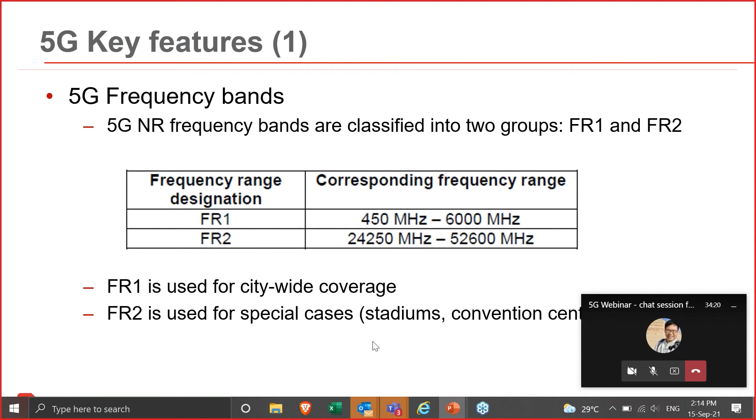Of course, latency is RF plus the wired, the internet side, the core side, but the RF side can be controlled using numerology. So we'll see later how numerology can impact the RF latency of your design. And that depends again on your applications that you want to use on your 5G network. So more flexibility for certain applications.

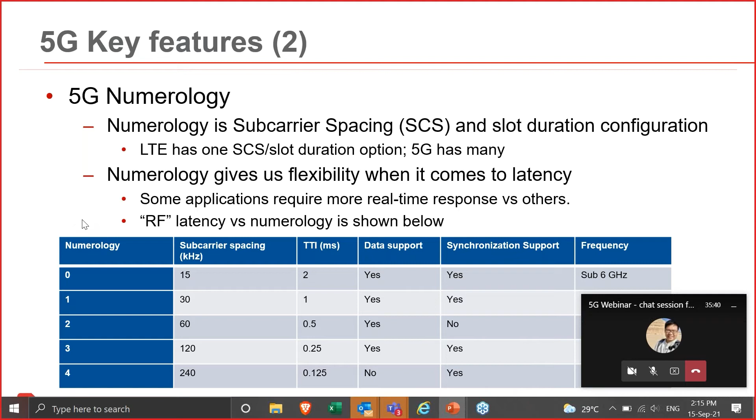The next one is known as network slicing. So again, 5G is being promoted as the ultra flexible technology. It's not purely for high throughput, high capacity. It can be for mobile broadband, which is what 4G is mainly aimed for, but it can also be for things like IoT and real-time, either autonomous driving or remote applications, whatever it can be. The idea is that network slicing allows you to split your network into different slices or segments and then have different parameters on those slices so that they are optimized for the services or the applications that you want to deliver.

So in IBWave, KT will show you how you can define the beamforming based on the antenna manufacturer you select. As a result, you will see an overall better throughput, not only by customer, but by cell. You get the most out of your network by using beamforming antennas and technology.

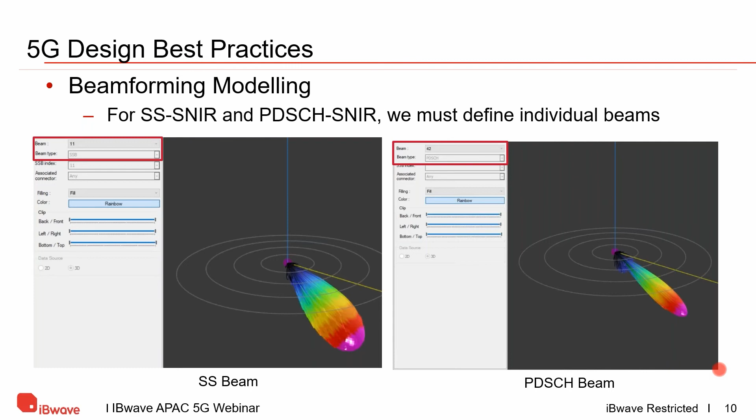So the second best practice is to take a look at what is defined as UE beamforming antenna gain. So far we talked about the beamforming at the base station or the gNodeB. So what about the UE? Does UE have beamforming? The answer is yes, it does at millimeter wave frequency.

For the teardown report on iPhone, and what Samsung has said in some public presentations, they have two RF modules at millimeter wave frequency. Each of these modules is a 4 antenna array. Why do they have two modules? It's because each of those two modules has a different linear polarization - one is plus 45 degree and the other is minus 45 degree, with 6 dB antenna gain.

So our suggestion is to define the 6 dBi antenna gain in our tools.

The next topic is on body loss. Body loss is higher at millimeter wave compared to sub-6 GHz. In IBwave, we measure body loss with 2-person penetration to be in the 20 to 25 dB range. If a stadium antenna is mounted overhead, we think 1-person penetration at 15 dB body loss is going to be more appropriate compared to 20 to 25 dB. This is the body loss suggestion based on the worst case scenario, where the stadium is a full house and everyone is standing up during the game or concert.

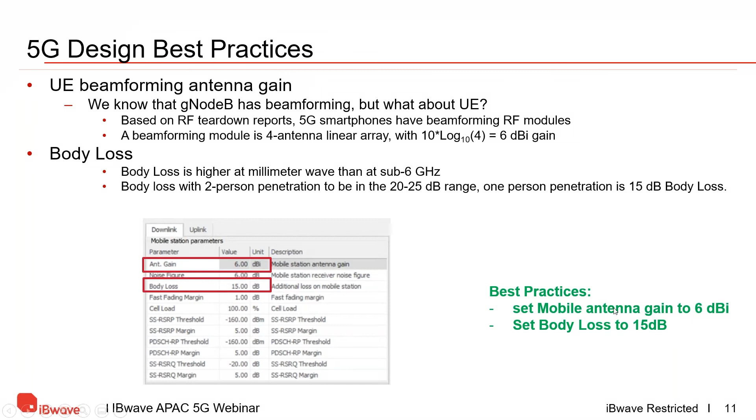Oops. Sorry, the screen's not moving. Come again.

For the compliant distance, we can figure out the location of exclusion zone number 2. Now we know what our exclusion zone number 1 or number 2 is, so we need to figure out which one is larger. Then during the site survey, we try to find the location in the venue where we can have clearance between our antenna and the larger of these 2 exclusion zones.

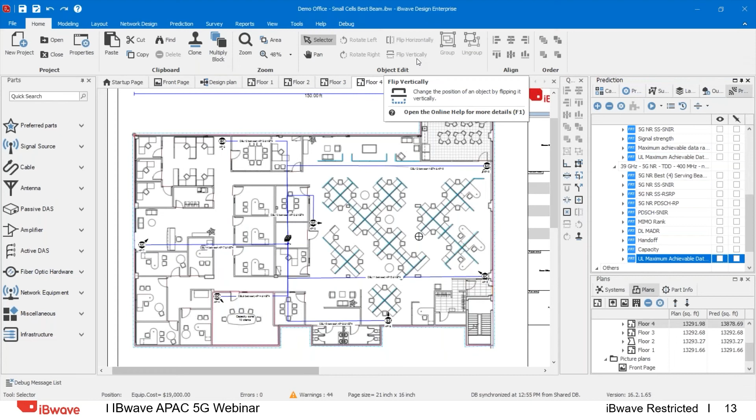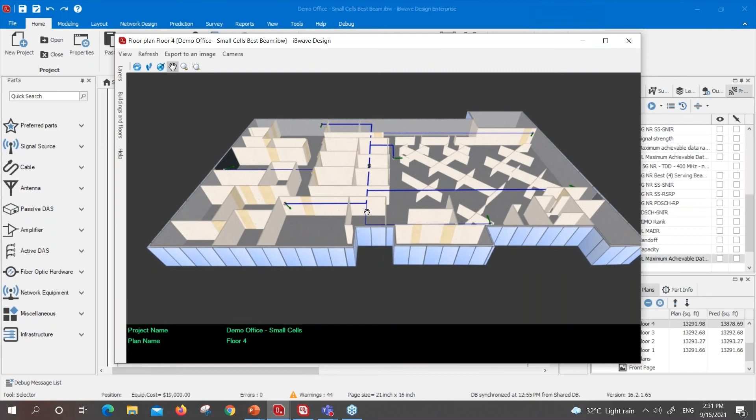So first, what do we have here? We have this floor plan with partitions defined, and a design of small cells with their locations shown. Let me show you how they look in 3D. You can see the partition is defined, and here are our transmit antennas. These are the antennas located at the cubicle area, these cover the meeting room, and these cover the entrance. From the entrance, this is the hallway leading to the meeting rooms.

So where do we want to put our antennas? We can imagine when guests come to the office, they arrive at the entrance and are always invited to the meeting room. So we must make sure we provide a very good connection with high throughput from the entrance to the meeting room. Besides that, we also need to make sure there's continuous connectivity from the entrance to the meeting room, and make sure the hallway is covered as well. So this is how we strategically decide where the small cell locations are.

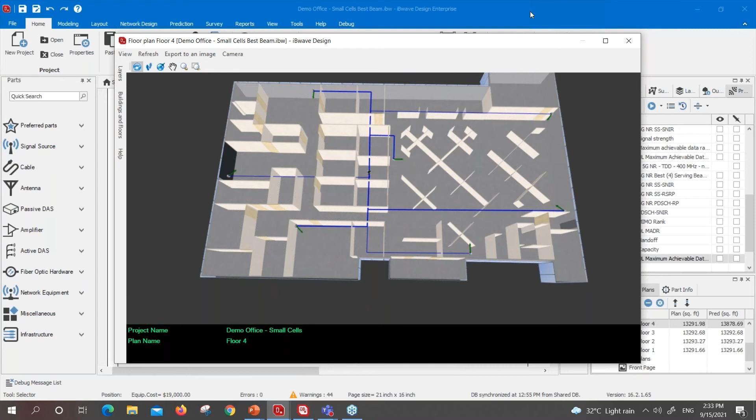So now we need to go to the property to make sure that what we did matches what we decided before. In IBWave design, when we do our sanity check on the parameter configurations, you can go to the property. For 5G, you can go to the 5G NR technology here.

This is what Damien mentioned previously about network slicing. In IBWave, we call this a bandwidth part. Usually nowadays, for example in 3.5 gigahertz, we have 100 megahertz bandwidth. This is the start of the deployment of a 5G project or network, so the 5G user count may not be high. The operator may not want to fully deploy the 100 megahertz bandwidth for 5G, so what they can do is separate it — 80 megahertz bandwidth for 5G, and the other 20 megahertz they can define as, for example, IoT. So in our tools, we need to define this IoT as a bandwidth part, and later we can use this profile in our system configurations.

Coming below, we have this EMF setting — these are the safety distance settings that customers can set based on their country's regulations. After setting this, our tools will calculate the safety distance between the human body and the antennas, so we can identify where our exclusion zone is.

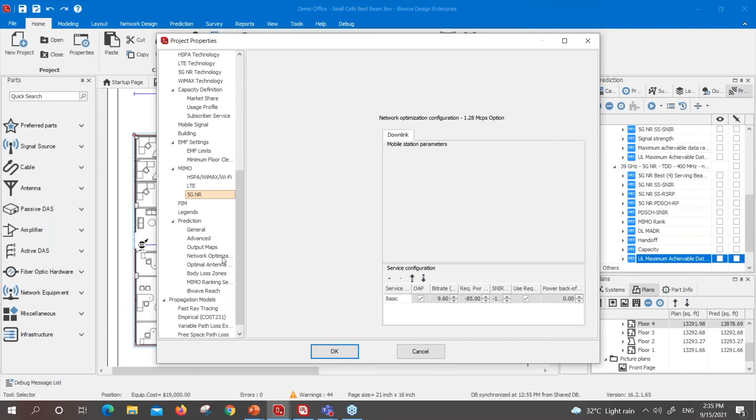Next we'll go to network optimizations. Here you can see the various types of technology IBWave covers. For 5G NR, you can see here there's an antenna gain. During the previous recommendation, we recommended defining the antenna gain as 6 dBi and the body loss as 15 dB. So this is a sanity check that we need to do.

Let me enlarge this screen. At the bottom you can also see that in our tool, we support 5G NR up to 256 QAM. All these parameters are set based on the 3GPP standards.

So after we do this sanity check, we go back to our floor plan. Now we need to check our signal source — we double click on this small cell.

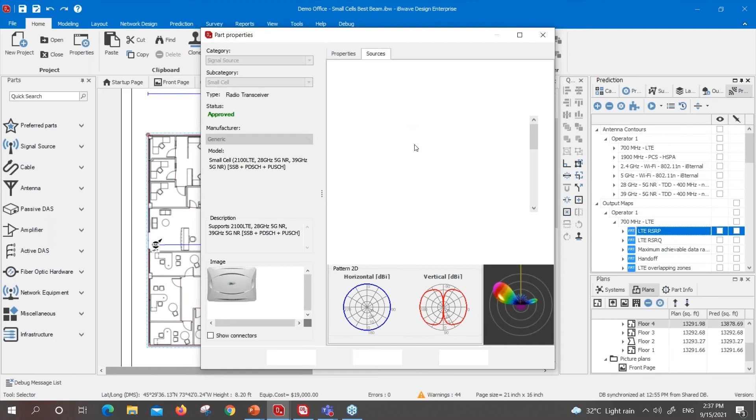So in this small cell, you will see the manufacturer name and the models. This is the small cell which covers 2.1 gigahertz LTE, 28 gigahertz millimeter wave, and 39 gigahertz millimeter wave. It has the SSB beam defined, PDSCH beam defined, and also the PUSCH beam defined. The transmit power will be 20 dBm. This value is based on the manufacturer's technical spec.

At the bottom, you also can see the antenna patterns in 2D and 3D. This small cell is defined as a 2x2 MIMO. So we can click inside there. In here, we need to make sure that we define the band properly. You can see we support up to 60 gigahertz millimeter wave and 3.5 gigahertz for 5G NR, and LTE for 700 megahertz.

So let's see for the 5G. We go to the millimeter wave. The millimeter wave for the 5G network is actually a little bit different from the LTE. In 5G, you'll see that slightly different additional configurations are required. At the bottom, you can see the sub-carrier spacing, a terminology that was mentioned previously by Damien. These are the 5G features and the resource block along with the sub-carrier spacing configurations.

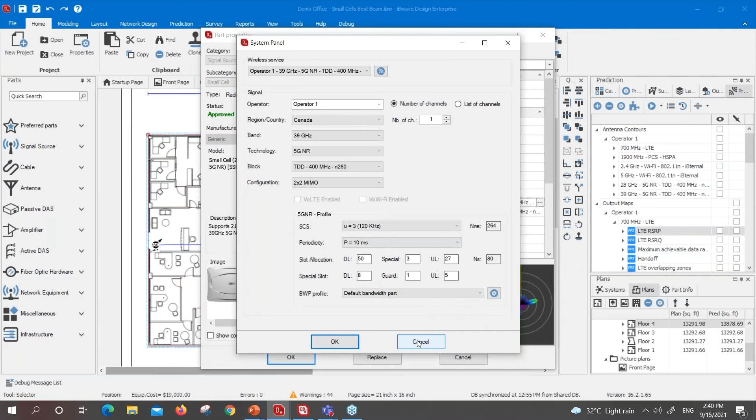Okay. So the final one will be the bandwidth part profile. These are the ones that we mentioned. Once we define another slice or segment, for example IoT, then we can select it here and allocate 20 megahertz for this IoT. Okay, so now we have made sure that we configured our signal source properly. Then we go back

to the floor plan. The next thing we need to check is the wall material. So we double click on the line. You will see that this is the drywall defined here, and these are the wall losses per frequency band. It supports up to 60 gigahertz.

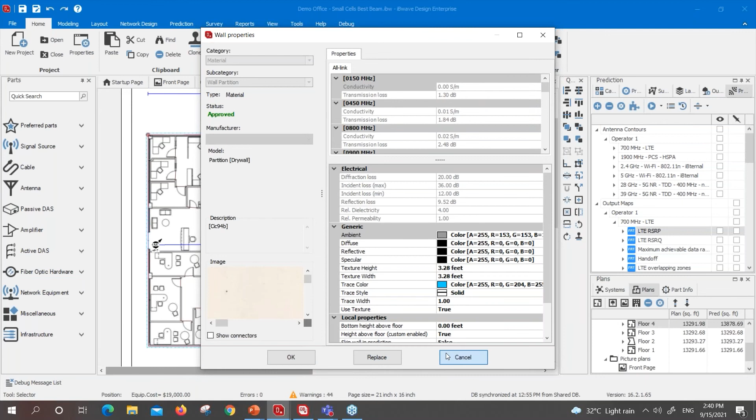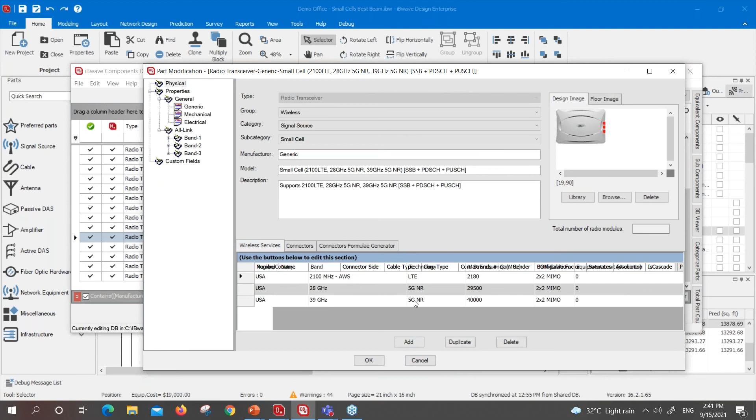Okay. Next we will move to the beam configurations. Did we define the beams properly for SSB and PDSCH? In iBwave, we have a database editor where you can check or define your own components. In this example, the small cell with 2.1 LTE, 28 gigahertz and 39 gigahertz millimeter wave. Here you will see the manufacturer name, the model name, and the description, and the wireless technologies it supports, 5G NR and 2x2 MIMO.

For the beams, we can go to the band. You can see it supports 39 gigahertz. In 39 gigahertz, we see multiple beams are defined. We go to beam 1. You see that for beam 1, the SSB ID is defined as 1, and it is defined as an SSB beam only. These are the antenna patterns for beam number 1, the SSB beam.

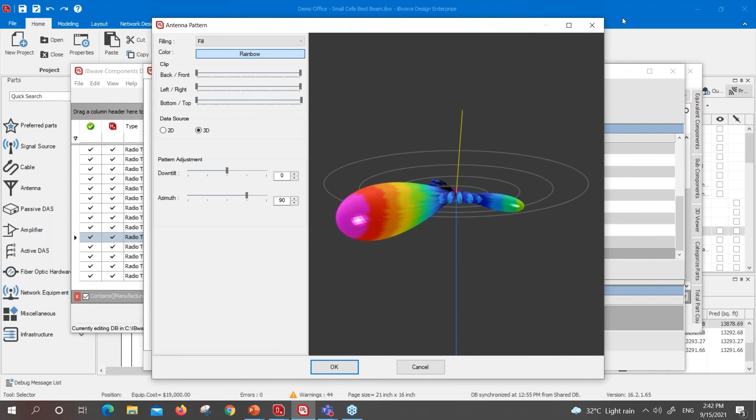Whereas we can go to, let's say, beam 7. Beam number 7 is defined as an SSB beam, PDSCH beam, PUSCH beam, and also the CSI beam. And below are the antenna patterns for beam number 7.

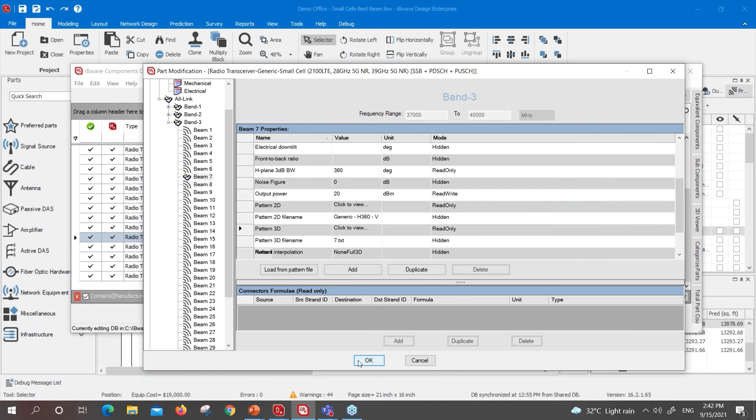So we make sure that we define the beam properly. So now we are good to go. Go back to our project. So here we create our prediction plot.

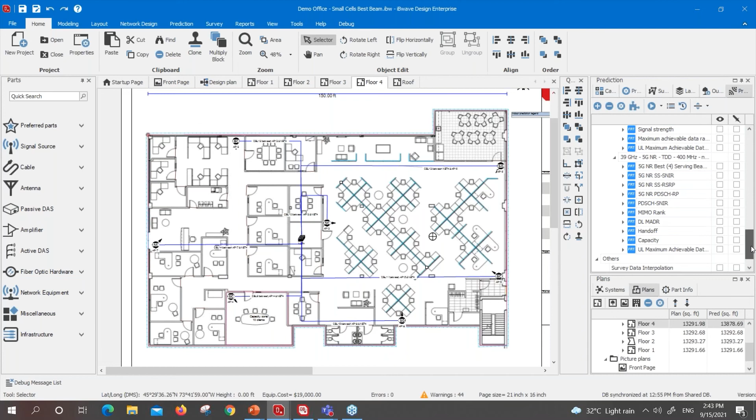So here we can create a prediction plot for 5G NR: the SS-RSRP, SS-SINR, the PDSCH SINR, and capacity, the throughput, the downlink throughput, uplink throughput. So let's see what is the coverage here. So we can check where's the coverage, SS-RSRP. So see, we only strategically cover some certain area.

So we need to see that, okay, the area like this, cubicles here, we achieve our coverage. So SINR is pretty good. And then from the entrance along the hallway, all the way to the meeting room, we have very good coverage. So as you can see as well, when the signal passes through the wall, the millimeter wave signals become very weak. Yeah, so that's why we suggest to design millimeter wave in better line of sight environments.

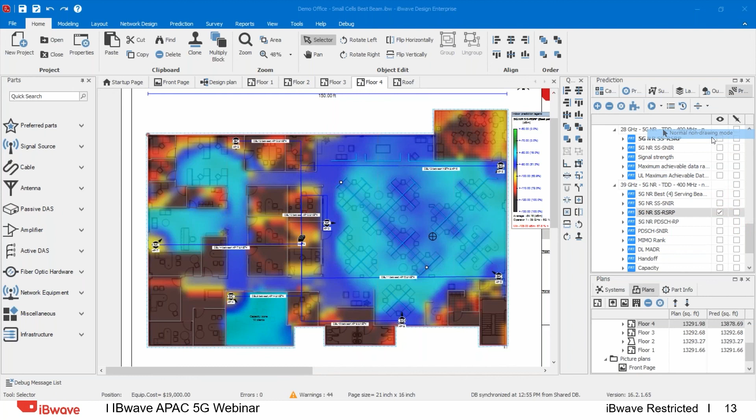Now we also can go to see the other plots. So for example, PDSCH SINR. So here you can see the SINR and the downlink throughput. Let me zoom in a little bit. You can see the purple color is about 3.7 Gbps for the millimeter wave.

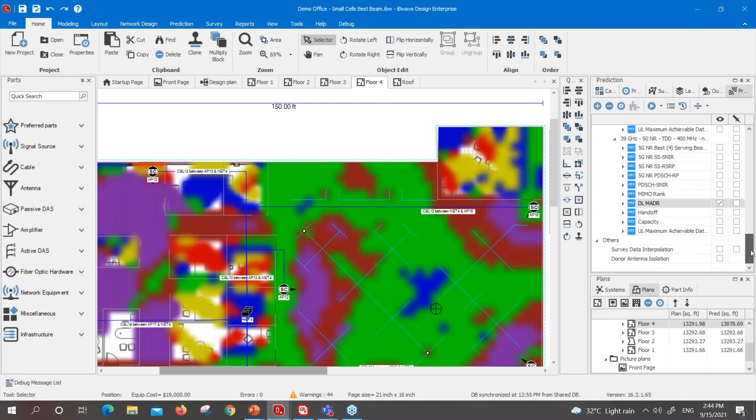So in our latest 16.2, we add in this uplink throughput as well, the maximum achievable data rate. So now our users are able to simulate what is the uplink throughput for their millimeter wave.

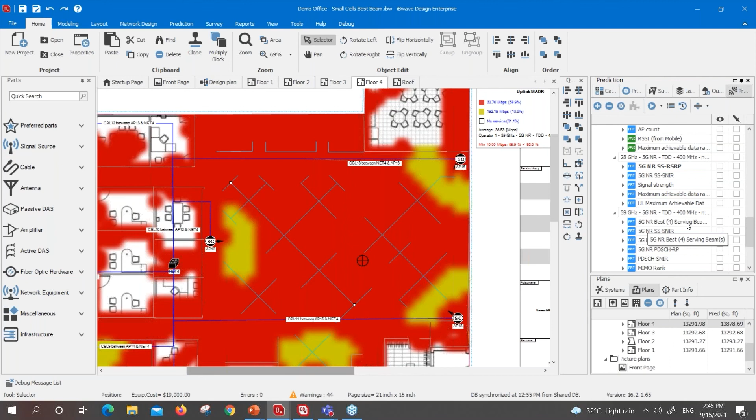So in our tools, what is another thing, since we talk about beamforming, can we simulate the beamforming? Yes. So we do have this 5G NR best serving beam simulation. So we click on this. So you'll see these circle things here. This circle thing means we simulate a UE in this location. And this UE is served by the best beam in this area.

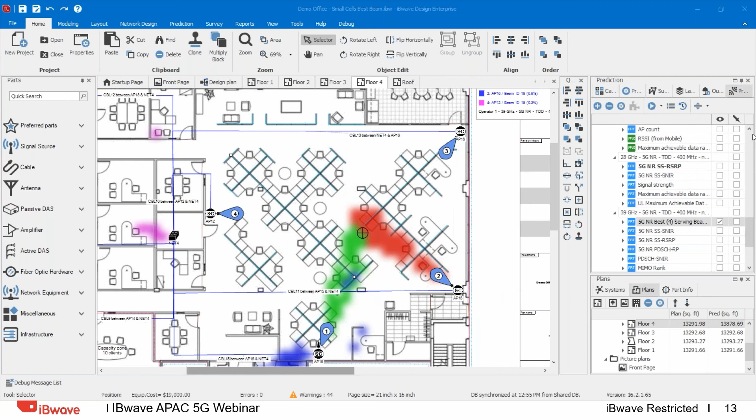So from the legend, we can see that the green color is from the AP18 served by beam number 26. So it's served by this small cell here. So the number 2 best beam will be AP15, and then the beam serving is beam 25.

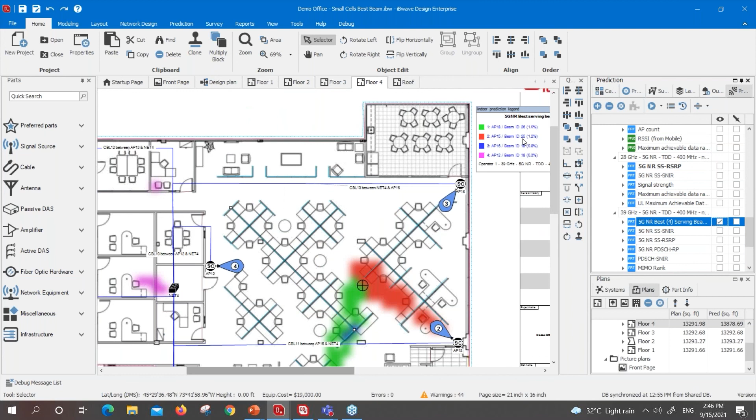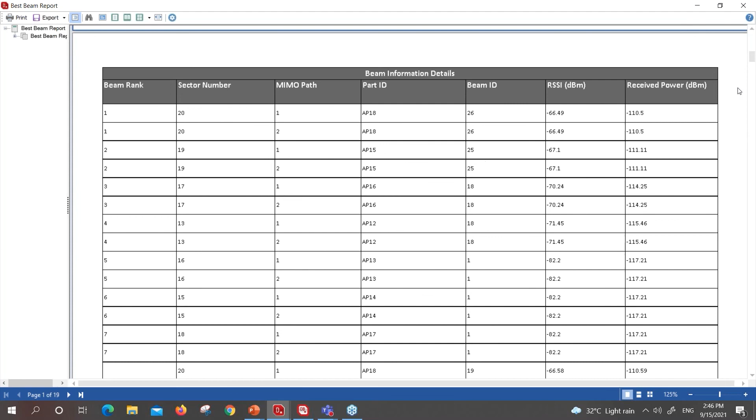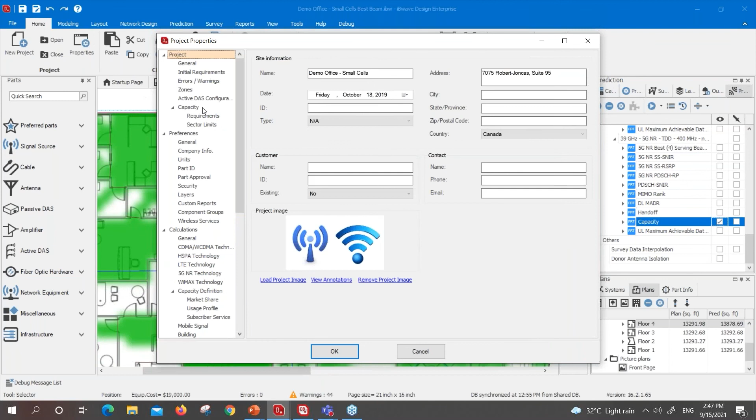Okay. So last, what I want to share is our capacity. So in our tools, we are able to calculate the capacity for 5G. So what the user needs to do is, again, go back to the properties. So under the capacity, we need to define how many users are on this floor. For example, we have 50 users on this floor, and what is the usage profile? The user behavior is an HD video conference.

So how we define the profile is, we need to go down to here, capacity definition, the usage profile. So in here, this is the example just now, HD video conference. Let us double click and see what's inside. So we assume that this is for meeting purposes. So this is for the video conference. So the meeting time duration is 1 hour. So during this 1 hour, what does the user do?

So since this is maybe a Teams meeting or Zoom meeting, they need to stream high definition video for the whole 60 minutes. So maybe the user will also need to make some phone calls, for example, 5 minutes, and then they need to search for some information via the web browser. So this basically defines the user behavior in that situation.

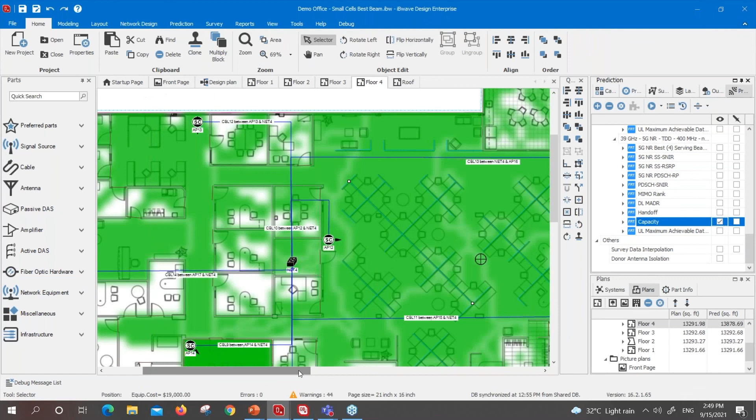So when we have this kind of user behavior defined, it will convert to the file size that needs to be transmitted. So it will come up with this total file size to be transmitted, and then the throughput required per user to handle this file size. So 24.71 per user. So with this setting, we run the capacity, then our tool will inform whether this passed or did not pass the capacity definitions.

So you also can activate the probes and move the mouse cursor onto the floor plan. Then you will see more detailed elaboration. So the target throughput will be 24.71, and then based on our calculation, the average data rate per client at a cell load of 50% can achieve 136.33 megabits per second.

So this is the end of the demo of the project. So let me move back to my presentation slide.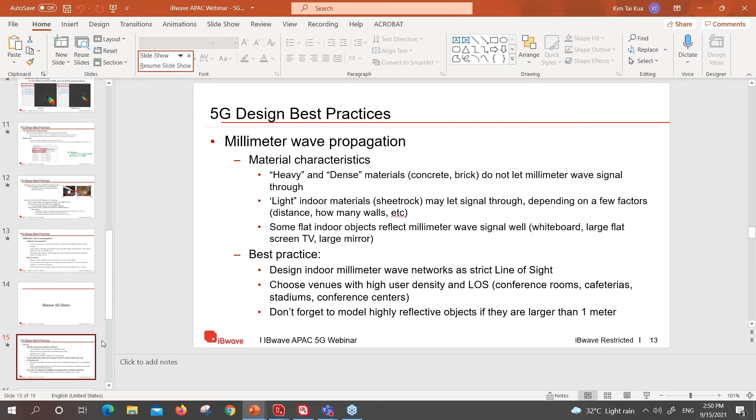So last, let me summarize again what the 5G design best practices are. Number one, we need to check the gNodeB antenna pattern for individual beams. Are they defined properly? Secondly, we need to adjust the UE gain to account for UE beamforming, which is 6 to 7 dBi. And we need to set the body loss as 15 dB. So we make sure that the ERP per path is in the spec range.

In order to configure those parameters, you need to have access to the manufacturer's technical spec sheet, and you have to have access to how it is modeled in iBwave Design software. So we need to always determine antenna exclusion zone number 1 and number 2 before the site visit. During the site visit, we first need to identify the potential antenna locations with the building manager based on those exclusion zones. Only after those locations are determined, we run the prediction and finalize the coverage scope with the building managers.

So we do not want to promise the building manager that he or she will have coverage in an area where it cannot possibly be, due to the restriction of the antenna location. And those restrictions are imposed because of exclusion zone number 1 and number 2. We also need to make sure we only use line-of-sight design for the targeted coverage area for the millimeter wave network. And don't forget to model highly reflective objects if they are larger than 1 meter.